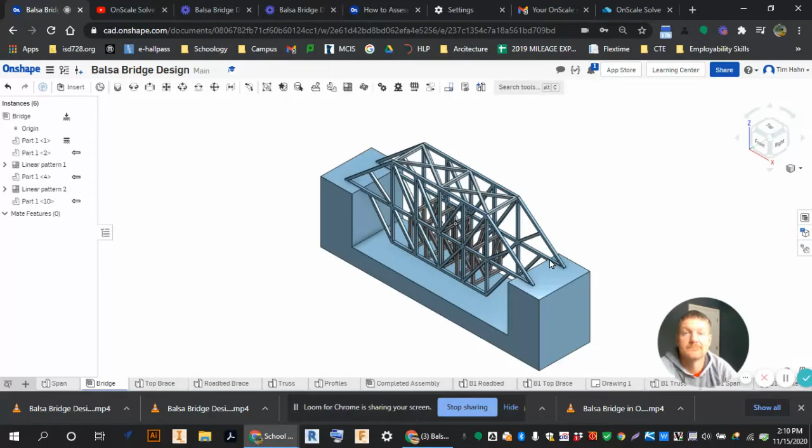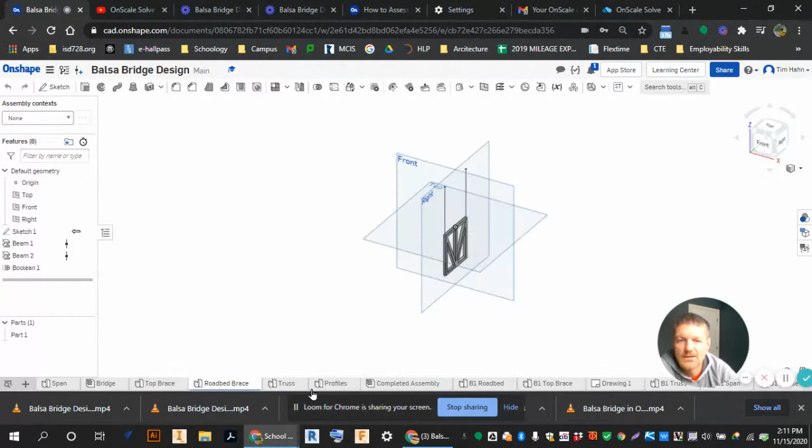All right, I have my bridge complete. You may want to add some more bracing in some places. You can always do that the same process, just add a new part from part studio and work our way there. But we got our assembly. I've named all of my pieces correctly. So I got the top brace, the road bed brace, the truss, the profile piece, and this is from the previous bridge I've done.

I have my bridge assembly, and I am all ready to go here. The span, I can move that span over here because I don't really need that with the profiles.

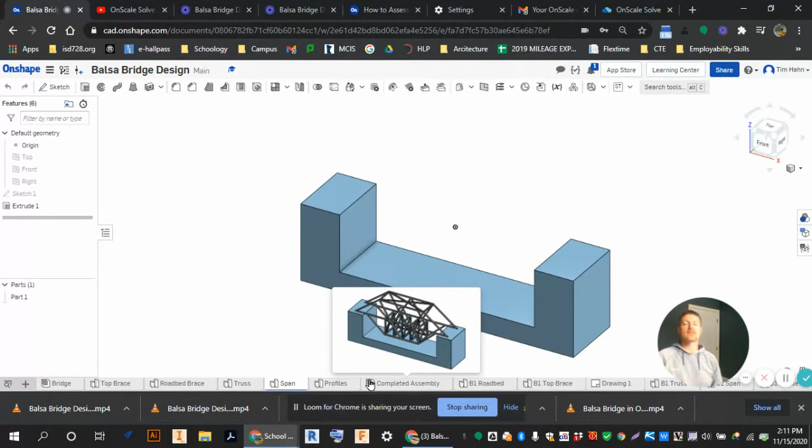Now let's move forward. Right now we got the model done on the screen, but we need to get this out and printed so that we can start working with it, laying stuff out and using it for a pattern. So we are going to go plus, and this is a new piece right here.

We're not doing a part studio, which is parts and pieces. We're not doing an assembly. We're going to create a drawing.

In drawings, I'm going to go to a custom template, and I'm going to start out ANSI English. Border, I'm not going to include the border. Title block, we're going to include though. So custom template, again, custom template, ANSI. We're on A size paper.

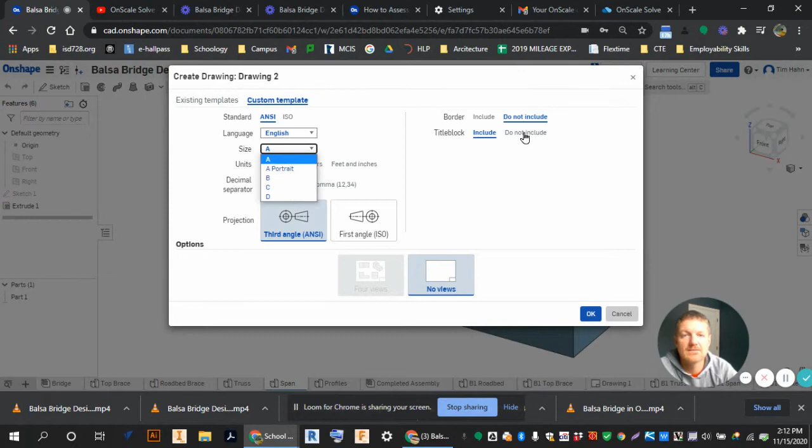We're going to talk about paper size here in a little bit. If you can get in, we can print it on B size, it may be a bit easier for you. But if you're not planning on getting in, that's perfectly fine. We can work on it on A size paper if you just want to print it at home. If you don't want to print it at home, we can do B size, perfectly fine. So I'm going to do A size just to show you what that looks like, and we're planning on printing at home.

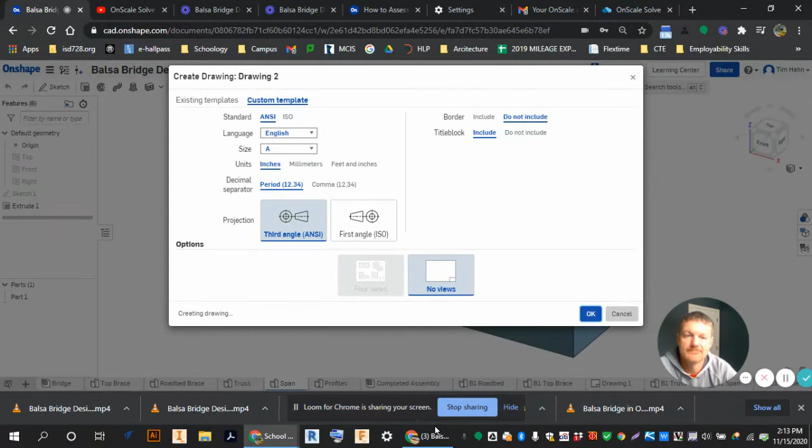Hit OK. And it's bringing our piece of paper up. So here is my drawing sheet.

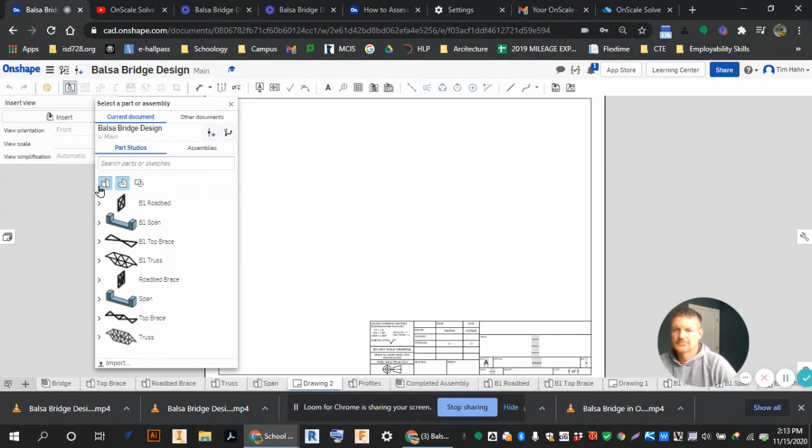I'm going to go insert. On here, you may not have this stuff quite so well, but we're going to start out by inserting assembly, and I want to insert my bridge. I have two because of problems there, and I'm going to go 1 to 1. And of course, it doesn't fit on the sheet of paper at 1 to 1, which is fine.

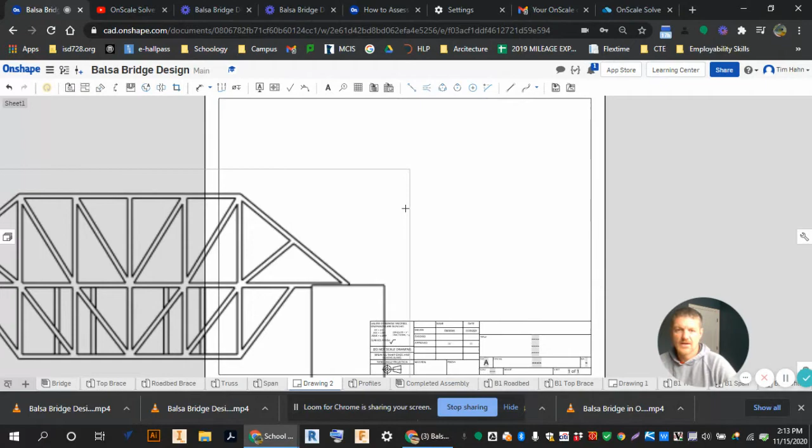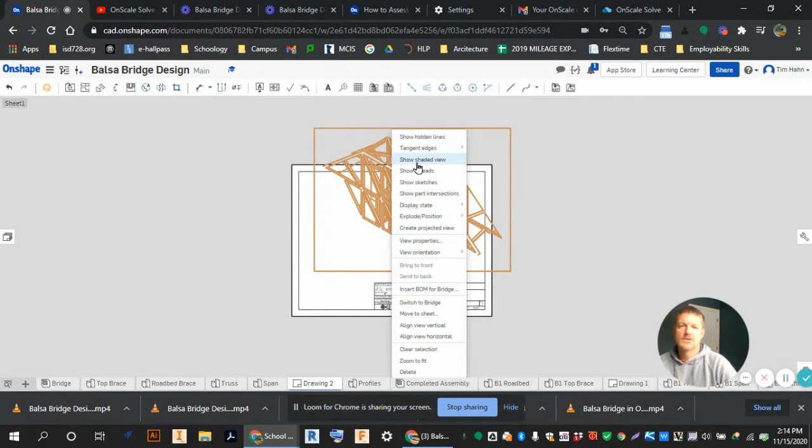And really, the one that I want is this one right here. So I can click on this view, delete it. Click on this view, right click, and hit Show Shaded View. And you're going to see what this does. It brought in everything and just made it look a little bit better.

It's going over the top of the title block, and that's fine for right now. We never really want to do that, but we're trying to just get this thing to fit on a sheet of paper. So we got the shaded view. There is our bridge on a piece of paper in isometric.

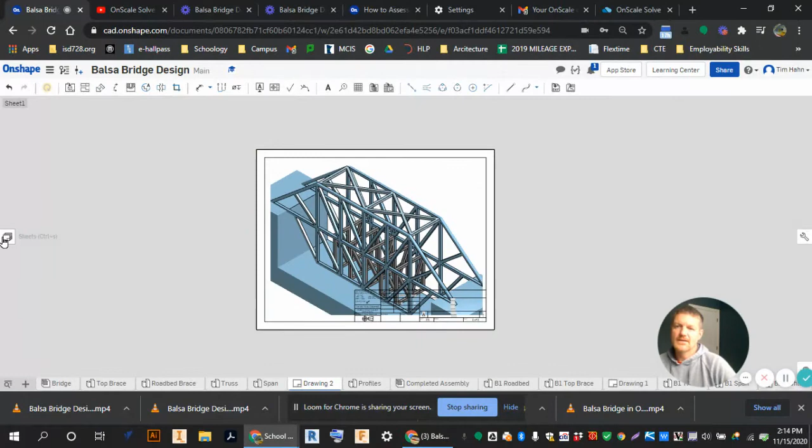Now over here, there's a little tab that says Sheets. I am going to add a new sheet, and we need to bring in our parts and pieces. So I'm going to start Insert View, and I'm going to hit Insert because I don't want this whole bridge thing to go on anymore.

I only want the truss. This truss has to come into full view, and you're going to notice it's not going to quite fit on this sheet of paper, which is okay. I'm going to click there to put it on this piece. Right click.

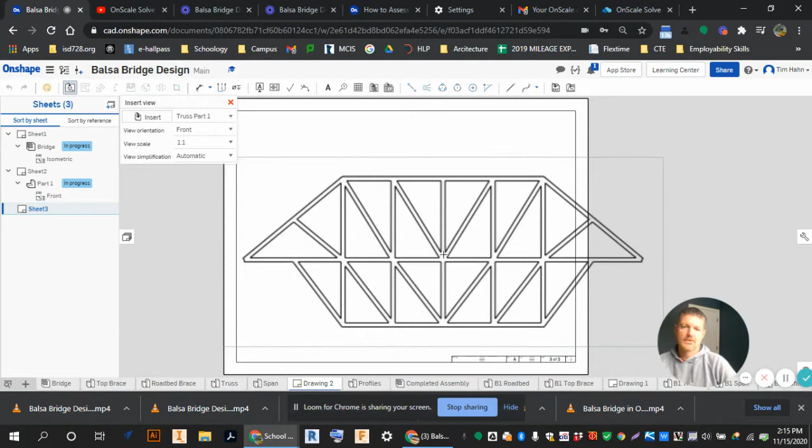Hit Add a new sheet. Insert Truss again. Change it to full size. And I'm going to get this half of the truss on. So now I have sheet 1, which is here, sheet 2, which is my right half of my truss, and sheet 3, which is my left half of my truss.

So if I go file print, I can just take this, cut the sheet of paper, and tape them together, and I have a pattern for my truss, or I can try to build what I can on here and then just lay it on the next piece. Adding a new sheet.

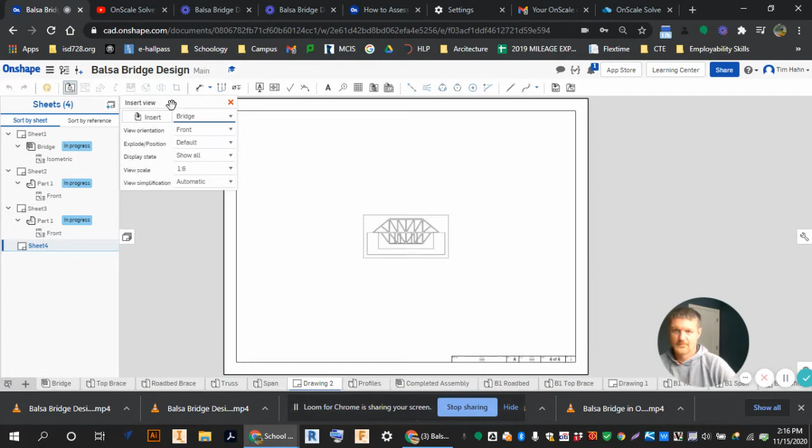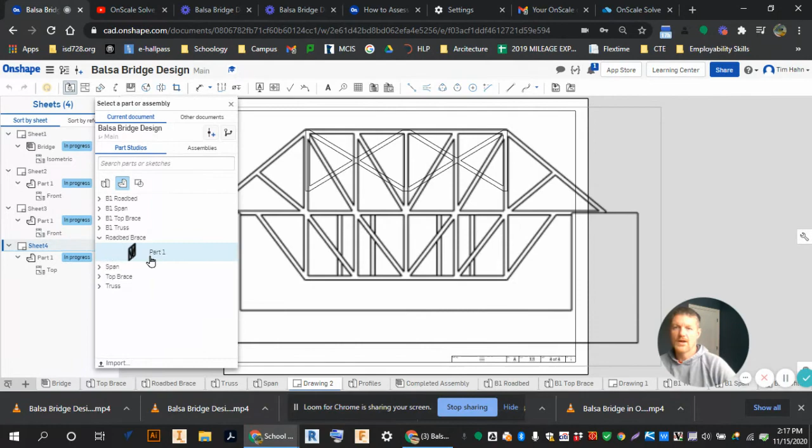I have my top brace that I need to build yet, 1-to-1, and I want to go top view on it. And I'm going to insert, because I can, my roadbed brace, 1-to-1, and I'm going to do the right view. And I need 5 of these.

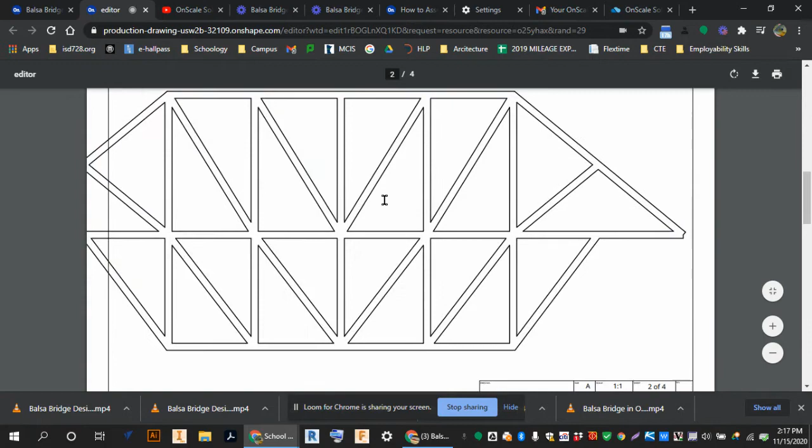So now I have all my patterns done on my different sheets and ready to print. So it's a matter of going up to Onshape and going to print. It's going to bring it up in the editor. There's page 1, page 2, page 3, and page 4. There's all my pieces that I'm going to have to print.

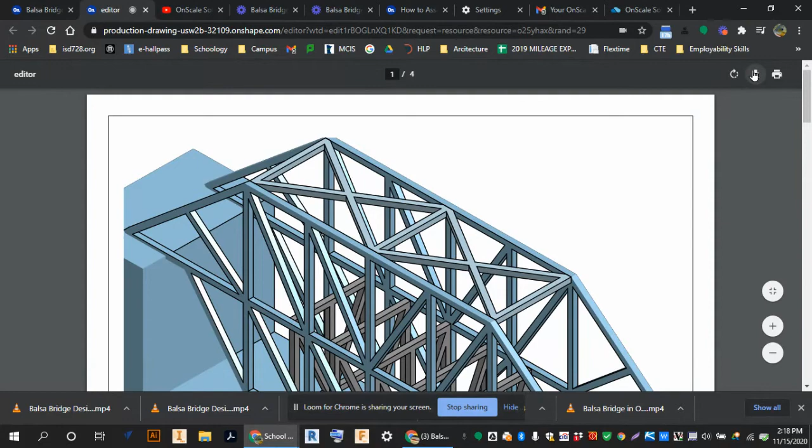And you can print at home if you want to. If you don't have a printer at home or you can't print from your Chromebook, perfectly fine. What you're going to do is download it, and you're going to call it Bridge Design. And save it and email it to me, and I'll be able to print it for you, and we'll get it to you.

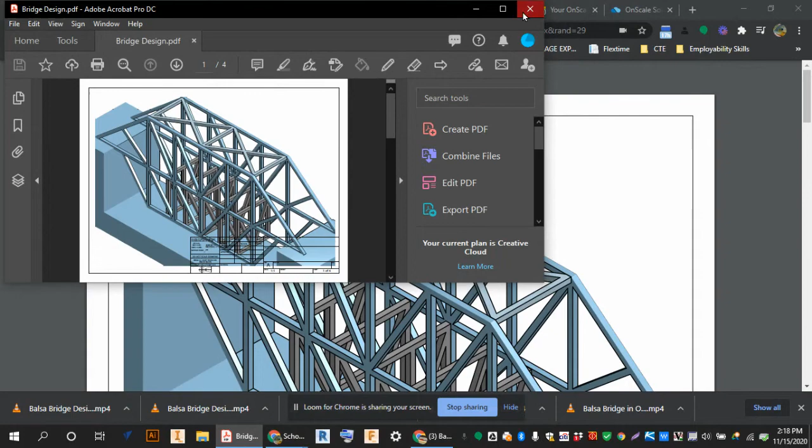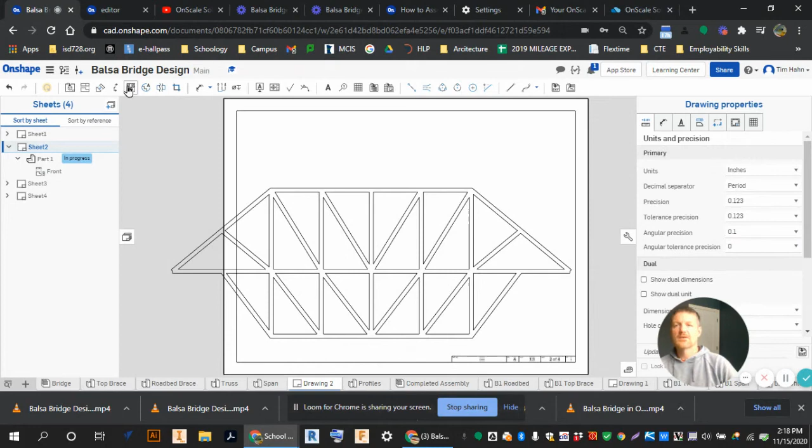In your email, just put your address you want it mailed to, and I'll mail it to you. The other thing you can do if you can't print it at home, instead of this sheet being an A-size paper, we can set that up to be a B-sized. So I'll go through that right now.

I'm going to create a new drawing. Instead of A, custom template again, I'm going to go to B-size. Do not include border, title block include, that's all perfectly fine, and hit OK. Now this piece of paper is twice as big. It's 2 A-size sheets of paper.

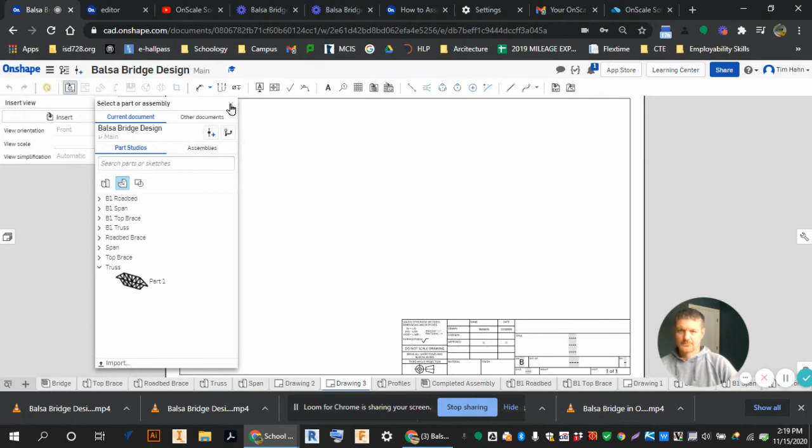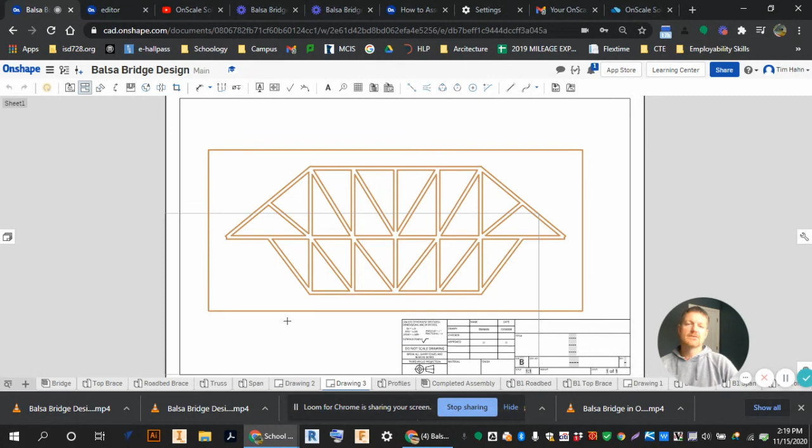Now when I add the truss in here, and I want to go 1-to-1. Now when I add that truss in there, it fits on this one entire piece. So if you're sending it to me, you can use that B-size sheet of paper. If you are sending it, or you're going to print it at home and you only have A-size sheets of paper, perfectly fine. You can use the A-size.

I'm happy. So you're going to send me an email with your address or where I'm mailing this back to, and let me know which size paper you used. If it says B or A, I should be able to pick that up, but that's how you get your print completed so you can send it to you, or so I can get it to you.

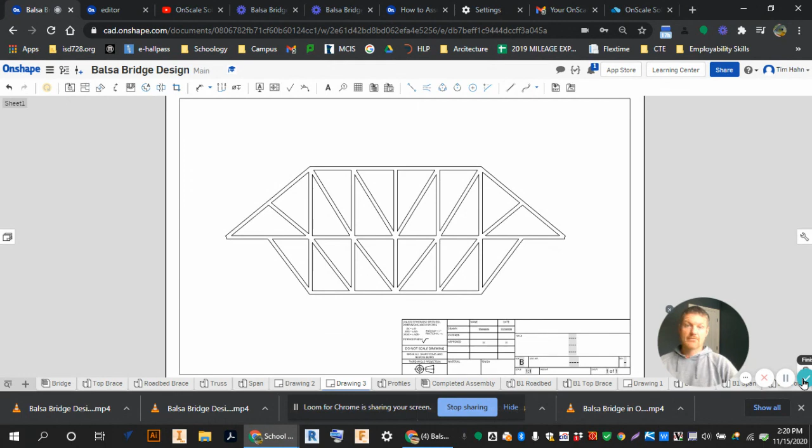Nice work on getting a bridge done. Again, tough project. You should be proud of your accomplishment here. Enjoy and have fun.